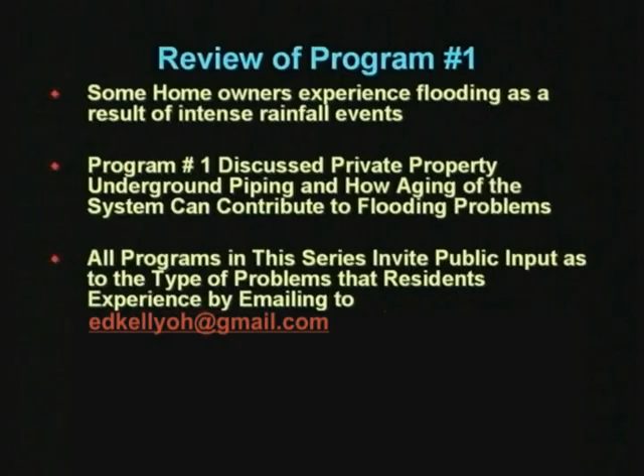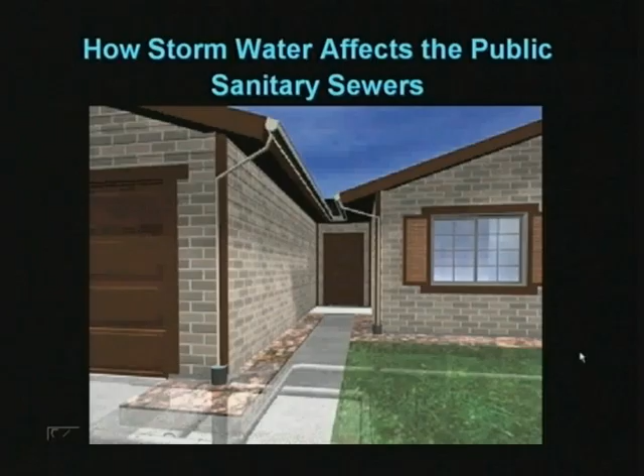First thing we want to look at is how does this stormwater affect the public sanitary sewers? We talked about private property, the piping on and around your house. Now we're going to talk about the piping in front of your house, and that is the public sewers. These public sewers are affected by rainfall just like your private property sewers, your small diameter.

As you can see, as rainfall hits the ground, water migrates into the soils, eventually into the areas where pipes are placed in the ground, and occasionally this water fills up and overtops the piping that is underground. And thus, sometimes if there are deficiencies in the pipe, this water can leak into the public sewers and cause problems or contribute to the flooding of an area.

Let's talk about what infiltration and inflow is, commonly called I&I. Infiltration is the water that enters the sanitary sewer system underground through pipe joints, line breaks, or cracks. When we talk about inflow, we refer to the stormwater that flows from roofs, pavements, yards, manholes, and manhole covers, and then in turn flows directly into the sanitary sewer.

The result is an occasional flooding of the public sewer system as seen in the picture below, where a 90-pound manhole cover is physically lifted up because of so much water that had surcharged in the system.

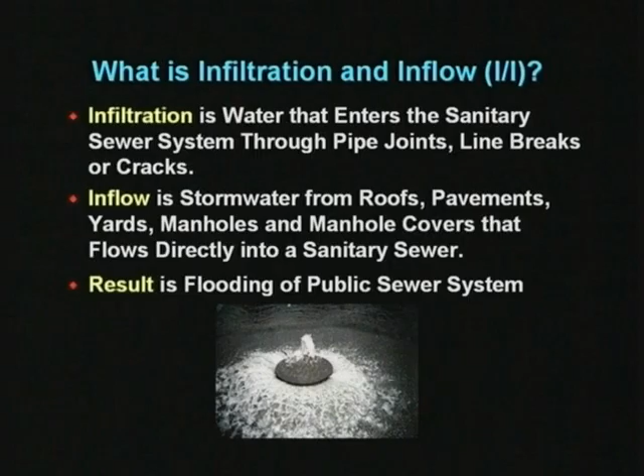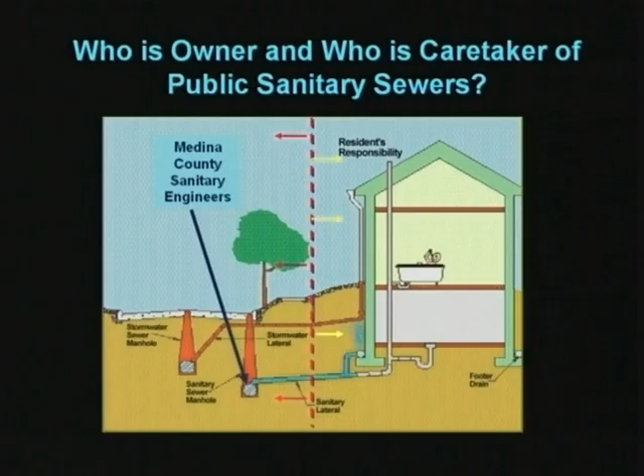In the first program, we talked about the responsibilities of the homeowner on their property for their own piping. Today we're going to talk about who is the owner and who is the caretaker of the public sanitary sewers. The public sanitary sewers are technically owned by the residents that pay their utility bills or sewer rates. So technically the residents own the sewer systems, and the caretaker is the Medina County Sanitary Engineers Group. They are the folks you see out cleaning the sewers, flushing, and occasionally making repairs when needed.

A little bit about the Medina County Sanitary Engineers: their job is bigger than just Brunswick and Brunswick Hills Township. They actually maintain approximately 531 miles of sanitary sewers throughout the county, including the City of Medina, the City of Brunswick, and several of the outlying townships.

They also operate 3 of the major wastewater treatment plants that the sanitary sewers flow to, with a total average rated daily capacity of 19.5 million gallons per day. However, they're presently treating approximately 12.5 million gallons a day, and they serve approximately 33,755 homes and businesses in the area.

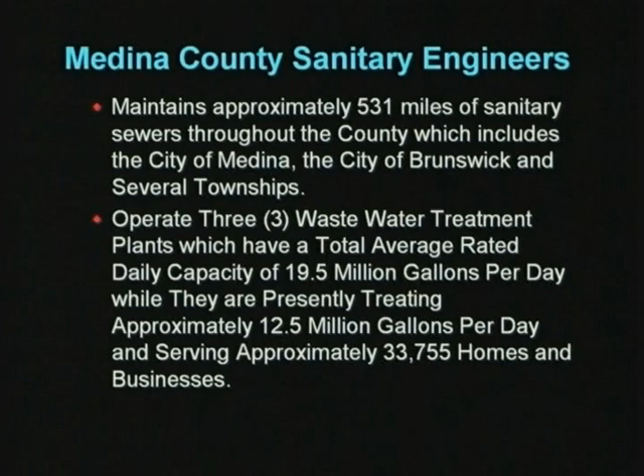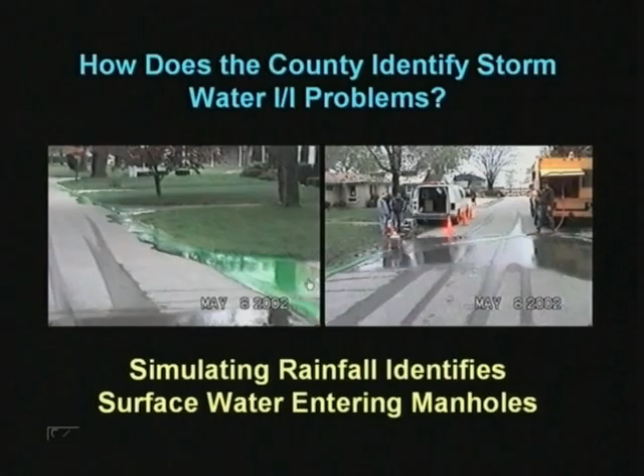Let's go ahead and look at what the county does in their investigations when they're looking for infiltration and inflow from stormwater into the public sewer system. If you watch closely on these videos, we're going to show a rainfall simulation where we actually add water just like it occurs when it rains.

So we're going to start the video and let you watch as we add dye water to the street, and it flows down to the end of the street about where this stop sign is in the left photo. But look on the right where this water is flowing in the street and circling in and around and through the sanitary manhole. The manhole has holes in the cover which allow ventilation for the manhole. However, it's not meant to drain stormwater from the streets.

So you can imagine several of these manholes out in the county area, and if they are low enough, and rainfall is flowing down the street as we're showing, it doesn't take much of this water to create or contribute to the flooding of area homes. So the county is continually inspecting and checking manholes in all the areas where they maintain the sanitary sewer system. So these are sanitary sewer manholes.

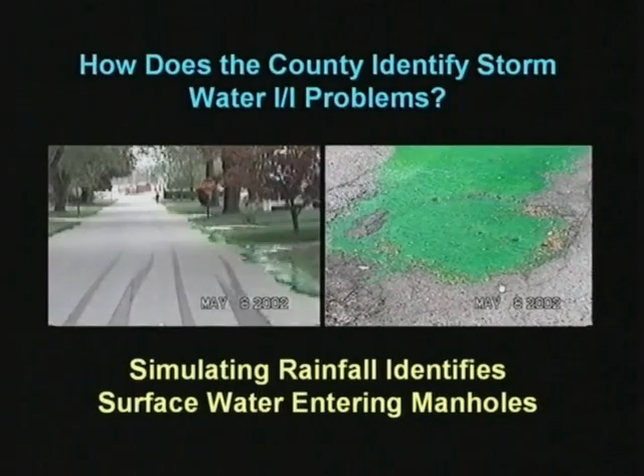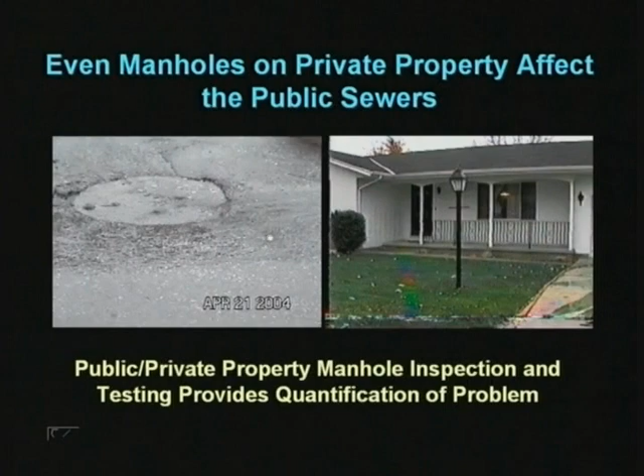And further, let's look at the same condition, but on private property where a manhole is located in a parking lot of an apartment complex. When it rains, as you can see, the rainwater is flowing through and atop the manhole and flowing into the cover.

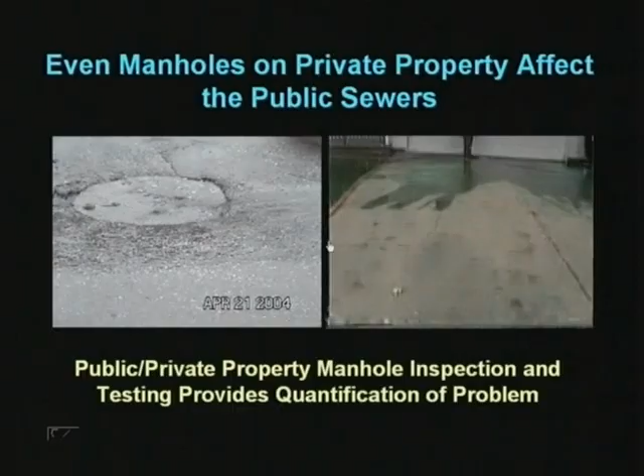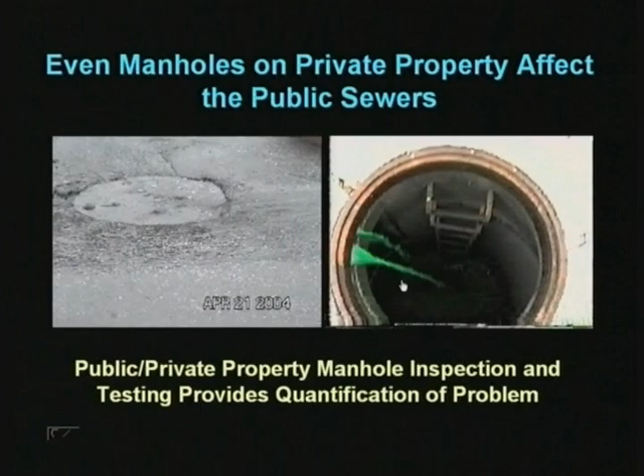And as well, on the right-hand side, as we look at private property, we're simulating rainfall. We're adding a little bit of dye to color the water to make it easy to see, and here's a sanitary manhole with leaks that we have simulated so that when it rains, you can see as much of this water flows into the small diameter pipe, which is at the bottom of the manhole, which is, again, the sanitary sewer manhole. And so these are the things that the county inspects, checks, and eventually fixes.

And speaking of fixes, when the county finds these types of problems, we want to look at just a couple of examples of the actual fix. The county either does some of these rehabilitation techniques on their own, or they contract this work out. Very simply, a spray coating can be used inside the manhole, and it actually seals from inside.

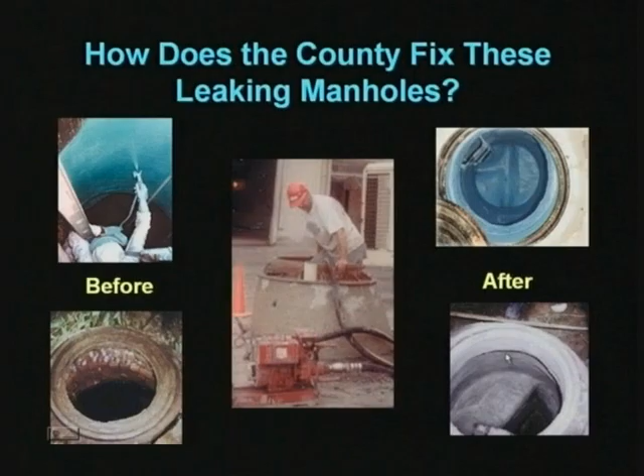And you can see the photos on the left where the gentleman has started the spray, and then on the far right and on top, you can see the finished product. The manhole has been sealed, and so now there are no more leaks from the surface water when it rains. Same way on the lower photo where there is brickwork showing here, and there were leaks found on the right-hand side. You can see that this has been sealed and now is not going to have any problems when it rains.

And now let's continue. We talked about the manholes, and those are one of the two components of the sewer system. We have the sanitary sewer manholes. Those are the access points into the sanitary sewer that the county uses for maintenance. They have to, at times, enter to make repairs, and also they need to enter the manholes at times for cleaning of the sewers. But let's look at what they look for in the sanitary pipes themselves. We talked about the manholes. Now we're looking at the second major component, which is the sanitary sewer itself.

Now, we look underground here as we look at your house and the piping that connects out to the street. One of your pipes takes your downspouts and all your stormwater to a large diameter pipe, which we show on top, and that's the storm sewer. However, the piping that is interior of your house that takes all the wastewater, domestic flow from your house, flows underground and eventually connects to a small diameter pipe, generally in the city of Brunswick and also in Brunswick Hills.

This is approximately 8 to 10 inches in diameter. So it's not very big, and it doesn't take very much excess water to cause a problem. However, these are designed for dry weather flows, so that during dry weather without a rain component, these sewers have sufficient capacity to transport the wastewater flows to the wastewater treatment plant.

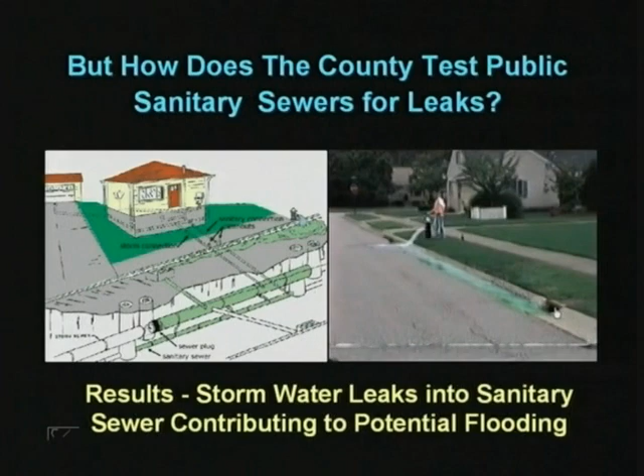As you can see in the illustration, there are leaks coming from this joint, and all of a sudden they migrate into the small diameter pipe. Now on the right-hand side, as the video starts, the water is added in the street and a camera is placed in the sanitary sewer, or the small diameter pipe. So as the illustration showed, we're using hydrant water. The water runs down into the catch basin and it eventually flows into the storm sewer.

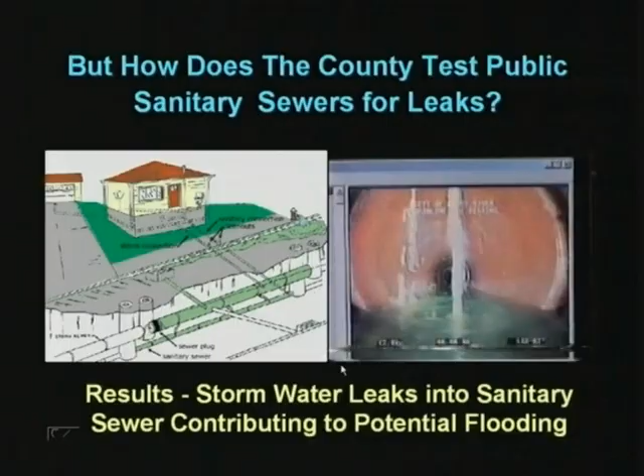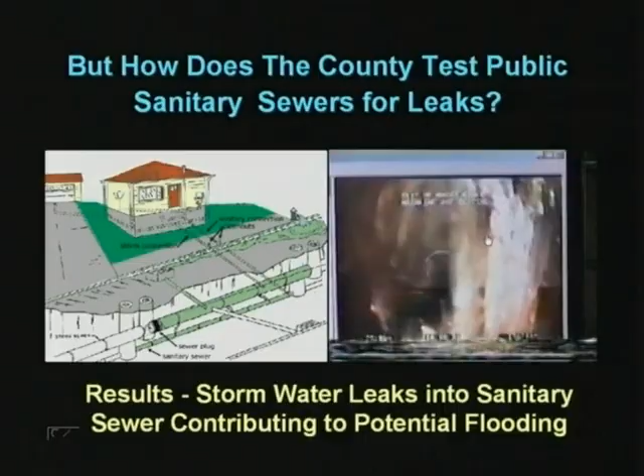And now we're going to watch the TV camera that the county owns, and they will place it in this small diameter 8-inch pipe, and now you see the camera moving downstream and trying to identify those leaks shown in the illustration. So these are leaks that are simulated during a dry weather period to see really what happens when it rains. So this is a simulation from another area, but it's very similar to what the county does in the Medina and Brunswick area.

Okay, one other testing technique that is used is called smoke testing. And the City of Brunswick has had this work done in several areas. Of course, some of the older areas, as the system ages, need to be tested to make sure that these leaks do not exist and contribute to the problems of flooding. Now, we'll explain smoke testing in detail if we can here.

This is your house, and the pipes, as we showed you last show, these are your stormwater pipes that come down, the blue dotted pipes out to the storm network, so when it rains, water runs off your roof area and goes to this storm sewer on top. Now, in smoke testing, we're actually testing the sanitary sewer.

So the county people take their own smoke blower, and then they add a smoke candle to the end, which is non-toxic, non-hazardous, and we'll turn this animation on, and you'll watch down below here as the blower is blowing smoke up the sanitary sewer, and as you can see, minor leaks are starting to show up, and that smoke runs into the storm.

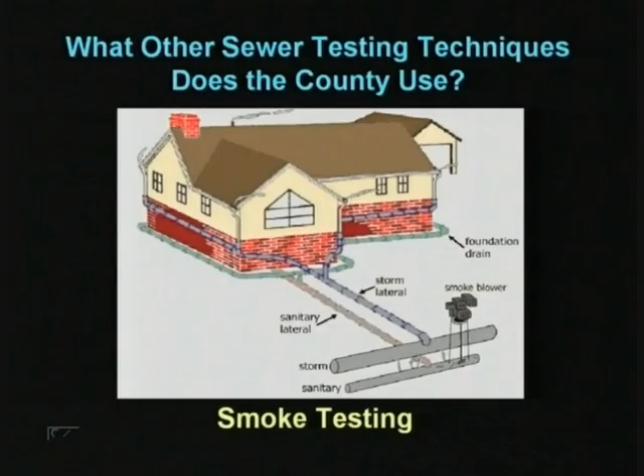Now, what that simulation shows is if smoke can travel to the storm sewer, stormwater can travel back to the sanitary sewer. So that is smoke testing that the county has done and will continue to do as a regular program of testing the sanitary sewer system.

Now that we've talked about manholes and their deficiencies and also the pipes, and we showed those leaking pipes, we're going to show you one of the techniques that is used to fix the pipes. The question always comes up when the county finds problems, how and what are the techniques that are used to fix these things. One of the techniques is called the lining process.

The reason they put this in is once the liner's in place, it has covered up the old service connections that were connected from the houses, so they have to go in and cut this area out. It's a special rotating cutter that they can go in and cut out a saucer area that allows that connection to operate again. These are all robotic tools that are used by either the county or contracted out.

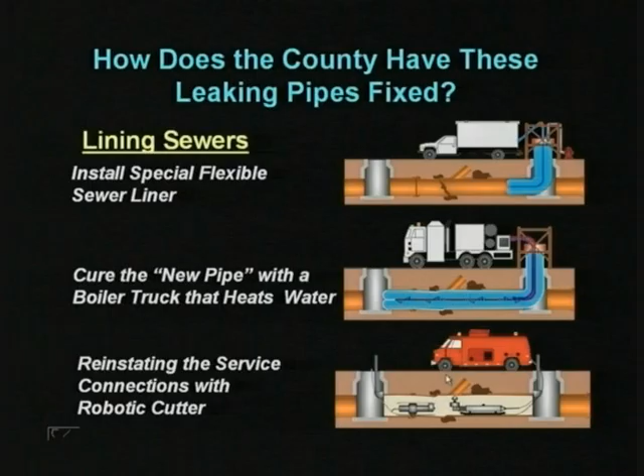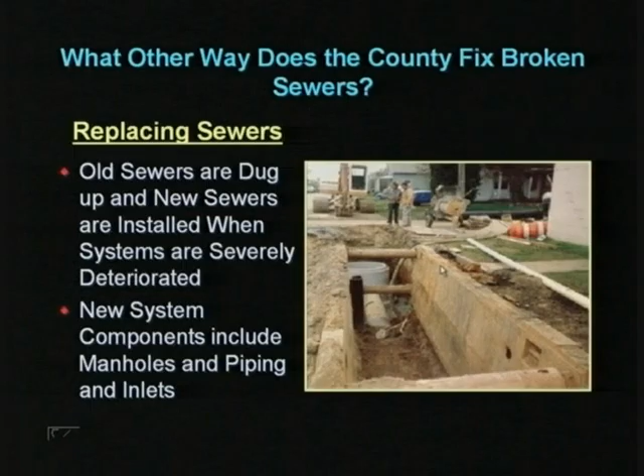Now we'll talk just a little bit about what the county has done, because everyone asks the questions, and some of these questions have come up as a result of what has happened over the years. Going back about 10 years, to sometime around 1996, the county has performed ongoing sewer investigations, and they continue to do this because the sewer system continues to age.

This is not something that the county or any other city can go out and fix everything all at one time and then we're good for 20 years. So basically, when systems are tested and checked, the county goes out, finds the problems, and makes the repairs. And some of the projects that were implemented over the last 10 years cost $1 million.

So some of these projects are not cheap, but it's important that the county is aware that some of these things are collapsing and that they need these repairs, and they're performing. So as some of the work has continued, in addition to the $1 million expense that's been done, there has been an additional 7 miles of sanitary sewers that were replaced in the Brunswick Garden area. And that was at a cost of approximately $3 million.

And they also performed a foundation drain removal project in this area. The last show we talked about foundation drains and how they affect the sewer system from private property. So this was a problem in the older areas of Brunswick, so the county did the project which removed these and reduced the amount of stormwater that was entering the sanitary sewer system.

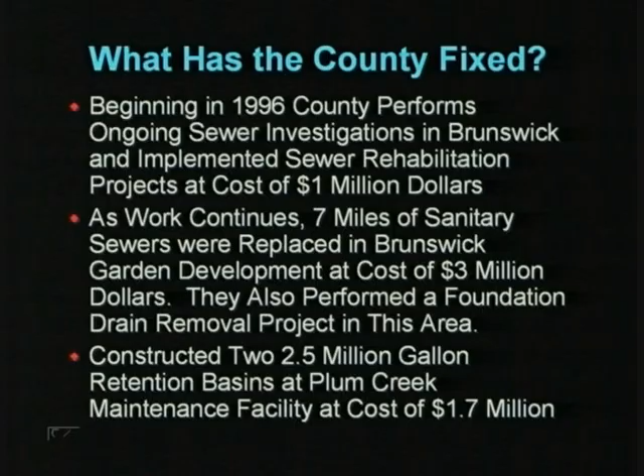And finally, they constructed two 2.5 million gallon retention basins at Plum Creek Maintenance Facility at a cost of $1.7 million. So the county has done quite a bit in trying to track down stormwater problems in the city of Brunswick and also Brunswick Hills, and these are just examples, if you will, of some of the things that they've done in the last 10 to 12 years.

And the question then comes up, well, if the county has spent this money over time, why do we still have problems? Well, the answer is very simple. As the public and private property systems continue to get old, new leaks develop, and it takes a continued partnership between the city of Brunswick, Brunswick Hills Township, and Medina County together to reduce the stormwater problems that affect these communities. So this is more of a maintenance issue that will go on and on.

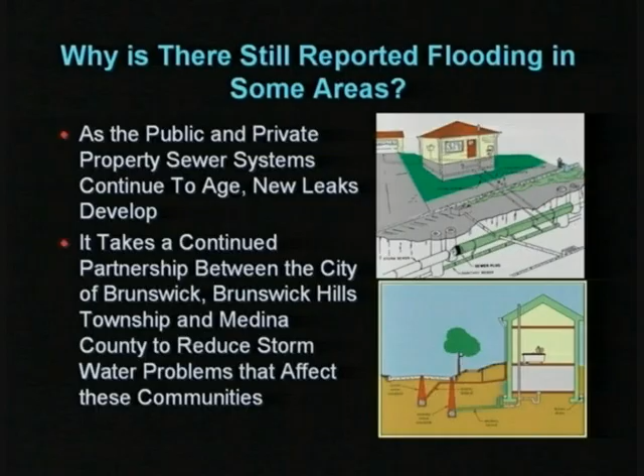There will always be problems as the system gets old. As the private property piping gets old, there will be problems on the resident side. As the public sewers get old, there will be continued problems that need to be addressed by the county. So this is really a continual ongoing program that is almost never ending.

One of the things that we've been asked about: why do I have backups sometimes even during dry weather? Some of the points that are on the county's website that I brought into this presentation are points they like to make on avoiding problems that will cause backups in your sewer system out on your street. One of the biggest things is to please avoid pouring grease, cooking grease or any other kind of grease, down the sewer drain or your sink drains or your toilets. Take grease, put it in a can or jar, and dispose of it in the trash.

The reason we ask about not dumping grease, bacon fats, any sort of grease, is that grease, when it's warm, flows through your sanitary piping into the large diameter 8 or 10 inch sewer in the street. And as it cools, eventually it hardens and adheres to the walls of the pipe. And as layer upon layer of grease deposits, the sewer eventually fills up with grease, and then we have a problem of a sewer backup. So you can help by, again, taking grease from your bacon fat, your cooking, and put it in a jar and dispose of it in the trash.

Use a garbage disposal sparingly, and while operating the garbage disposal, run cold water the entire time. And please avoid using the disposal for waste that is too large or too hard to be ground thoroughly, because those large objects end up in the sanitary sewer system and can contribute to the problems of backing up. Please try and use a drain screen to catch hair, lint, and other debris in sinks, tubs, and floor drains. These are other things that can get in and cause problems with grease and other solids in the sewer system and contribute to the backup.